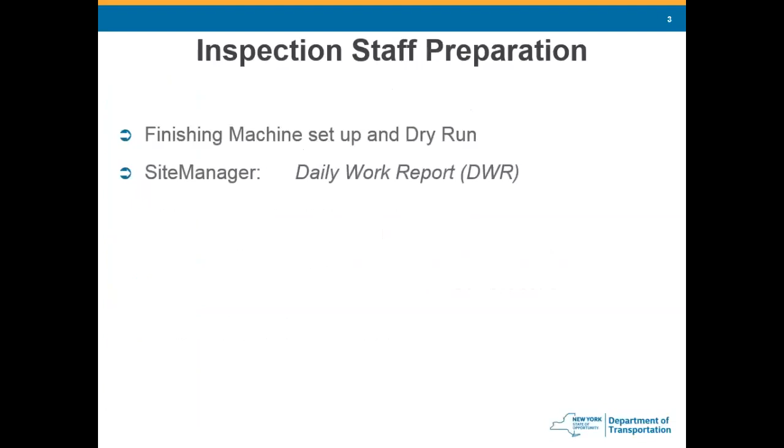The daily structural concrete report is the MERC 5, and that'll catch all the information you need to transpose into site manager. You should be familiar with what material certs are required - plenty of certifications have to be entered through site manager, and you have a lot more when you're placing concrete.

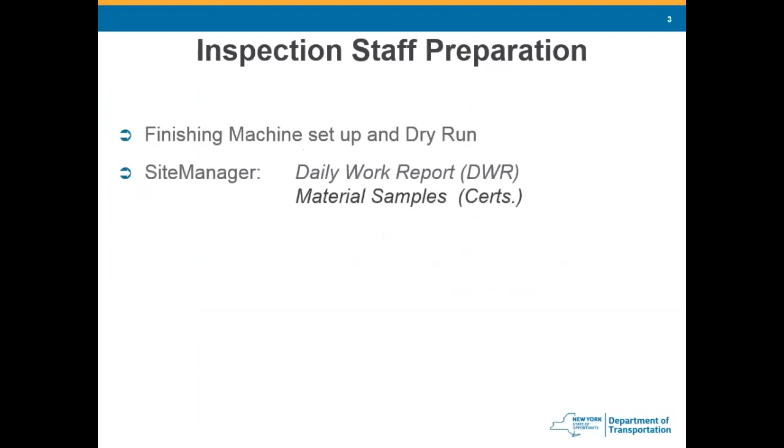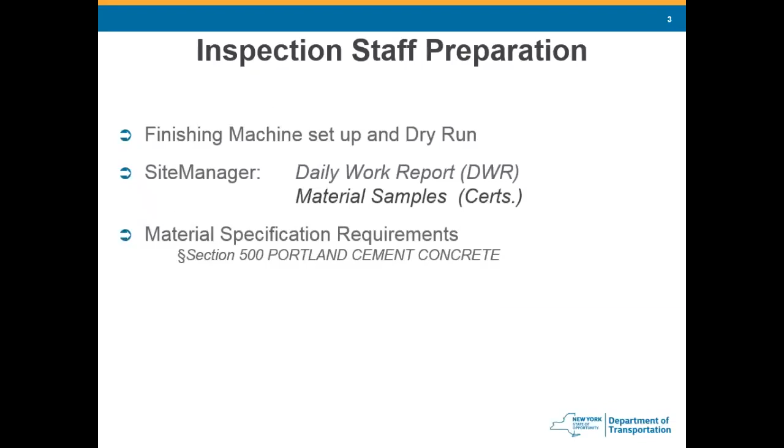Material specification section 500 of the standard specifications covers Portland cement concrete in general. The bridge deck item is section 557, which covers superstructure placement, sidewalks, and approach slabs.

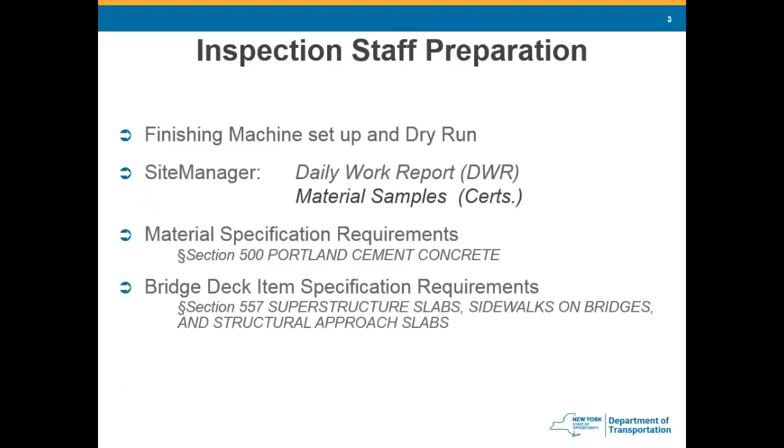So, advanced preparation. A pre-placement meeting - the specifications say the engineer should schedule that meeting at least 2 weeks prior to any placement of concrete for the superstructure slab. Generally, a good rule of thumb we tell engineers in charge is about the time the contractor is setting the steel girders, that's about the time to have it. We want to have the meeting 2 weeks in advance.

There's a lot of stuff that's covered. When you're having the meeting, you're going over stuff, and all of a sudden you realize, oh geez, we forgot about this, we forgot about that. That takes time. You don't want to have the pre-placement meeting a day or two before the concrete placement because you could run into trouble.

Also, once the girders are set, you're going to complete a haunch table, and the haunch table is used while you're doing the dry run out in the field.

During the pre-placement meeting, the main office materials came up with an agenda to cover various aspects of the placement. You have the general placement information - what date it's going to be, what time they're going to start, what the delivery schedule is, how they're going to place the concrete - one pump, two pumps, a pump and a crane, where they're going to be located. A lot of general information is covered.

Then we get into the materials information. For the pre-placement meeting, besides the engineer in charge, they'll have the regional materials engineer or somebody else from materials there, because now the contractor has to tell us how much concrete they want per hour, what slump they want, what air content they want. The materials people talk about what admixtures are being added - retarder, air entrainment, and other things associated with the mix. Then the deck machine is discussed.

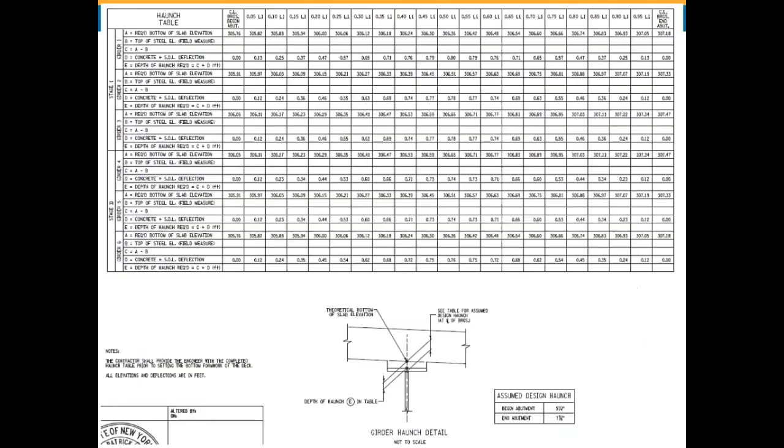Here's a blown up girder 1, blown up version of it. When you get the plans, you're going to have the required bottom of slab elevation. That's already filled in. They're going to give you the deflection based on the concrete that's loaded onto the girder. The girder is going to deflect a little bit.

I made up some numbers here, so the surveyor is going to go out, survey the top of the girder, come up with these elevations. So then they take the difference between the bottom of the slab and top of the girder. So that's the depth of the haunch.

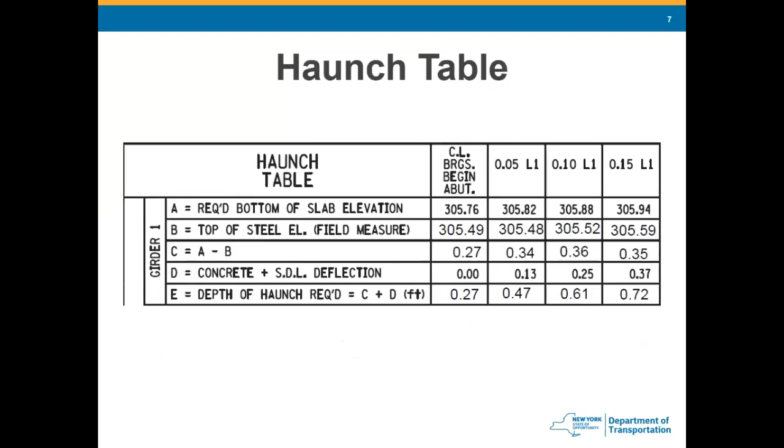Well, right here at the abutment, there's going to be no deflection because it's sitting right on the bearing. You start going out into the span, you're going to get a little bit more deflection, so your haunch is going to increase a little bit as you go out.

So if we look at the diagram I showed you earlier, you've got the haunch and the thickness of the deck, 9.5 inches, which is 0.79 feet. For point L1, the haunch is 0.61 feet. So 0.61 feet for the depth of the haunch plus 0.79 feet for the thickness of the deck gives you 1.4 feet. So when you go out there for the dry run, you're going to go to every 10th, 20th point, whatever they have laid out, and measure from the top of the girder to the bottom of the finishing drum on the machine.

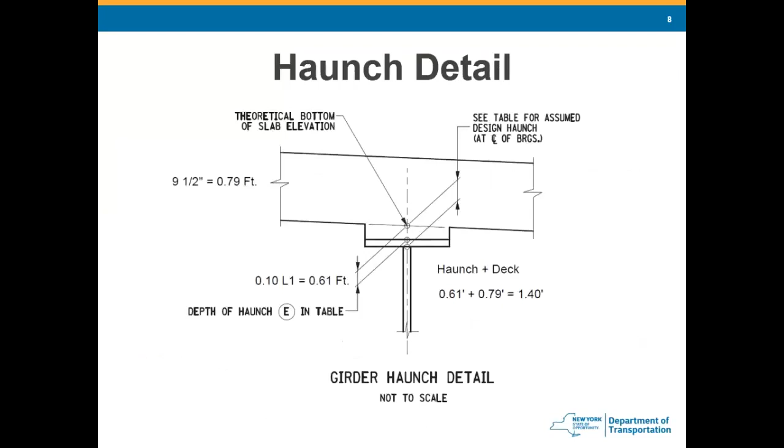So at point L1 on the first girder, you should measure 1.4 feet, which is basically 1 foot 5 inches, and that's the measurement you should have between the top of the girder and the bottom of the drum on the finishing machine.

So when you get out there for the dry run, the engineer in charge will have you out there if you're going to be the inspector up on the deck during the dry run.

Verify that the finish machine is set up. Travel rails, generally the contractor uses 2-inch Schedule 40 pipe that the machine runs on. It's set up on the fascia on both sides, supported every 2 feet. All this stuff is in the specifications, so there's a place to find it.

The engineer in charge should know where to find it. He should be pointing you to review this so that when it comes time to do the dry run, you'll have an idea of what's going out there. Plus, they should be explaining it to you while you're out there so you learn.

Verify the crown location. If it's a straight bridge, the crown of the road is going to be in the middle, so when they set up the machine, the crown should happen in the middle of the bridge.

String line the carriage rails. On the truss that supports the finishing machine, and on the inside of each truss, there's a carriage rail. The carriage runs back and forth across the deck on that carriage rail. Put a string line on it to make sure that it's set up properly, it's nice and smooth, and there's not going to be bumps going all the way across.

And you verify the cross slope on the carriage rail. You have a smart level, set it on the rail, and verify the cross slope.

The finishing machines, generally you'll see 2 of them. You'll see a Bidwell and you'll see a Gamaco. They're generally the 2 that contractors use. There is an Allen, that's a new company, very similar to the Bidwell.

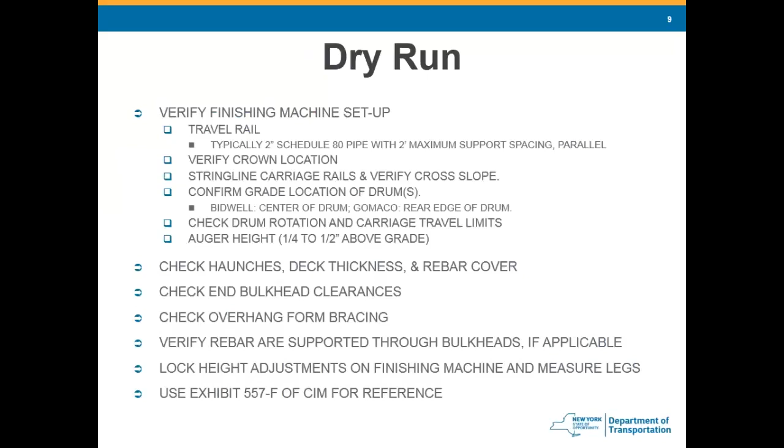So placement day, prior to starting, you need your testing equipment. Everybody that tests concrete, whether it's DOT employee or consultant, has to go through the concrete testing class. We have the in-house PCC training that the construction office materials group should be given to you. Any consultant should be ACI certified.

As I said before, the MURK 5d is the paper form of the DWR. You get that out in the field, it's going to get wet, it's going to get concrete on it. So you can fill that out, then transpose all the numbers into site manager once you get back to the field office. You need a concrete temperature, so you need a thermometer.

You're going to do a slump test. You're going to need an air pot with the backup, because there's been times you're out there, you got a 5-hour, 6-hour, 7-hour, 8-hour deck pour, and things are going good, and all of a sudden halfway through you're testing concrete, and all of a sudden you blow a seal on the air pot.

Well, it's always good to have a backup. Something could happen to the air pot you have on site, and all of a sudden you're getting bad readings, and you start rejecting trucks, and it doesn't matter to the contractor or the concrete supplier, and they get angry at us for rejecting trucks, then accuse us of testing wrong. Well, break out another air pot and check it again. Have them bring out an air pot and compare each one to the other, make sure the numbers are close.

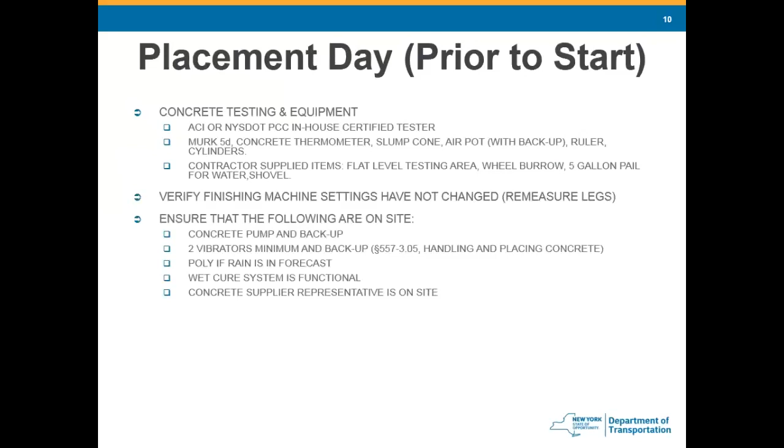This falls more on the engineer in charge to make sure it's right, but as inspectors, you're extra eyes out there, so you should be checking this stuff out. If you see something that's not right, bring it up to the engineer in charge and say, hey, how come they don't have 2 pump trucks there? What's going on? Ask the question.

Don't be afraid to ask the EIC the question. He could be thinking about 5 other things going on in the job and saw the concrete pump right there at the bridge deck and didn't look around to see if there was a backup somewhere. As an inspector, you're there to assist the engineer in charge, so make sure the pump is there with a backup, or if the backup's a crane with a bucket, make sure that's nearby.

Contractor has to have 2 vibrators minimum. Says that right in 557-305. Contractor shall have 2 vibrators on site minimum. It also says they need 1 vibrator for every 40 cubic yards per hour they plan on placing. So if the contractor's planning on placing concrete at a rate of 30 yards an hour, they're going to say, well, I only need 1 vibrator because I'm not exceeding 40. It's like, no, you don't - you need 2 because it's 2 minimum, and they need a backup.

Poly, in case rain is in the forecast - what's the contractor going to do if it rains? Well, they got to have poly on site in case a shower comes through so they can cover it up. Everything here that should be on site is nothing new to the contractor, nothing new to the engineer in charge, and it shouldn't be anything new to you if you were at the pre-placement meeting, because all this stuff is discussed there. Make sure they're going to use sprinklers. Make sure if they're pumping out of the creek, the pump works. If they're using municipal water, do they have a wrench to turn the fire hydrant on? They have to make sure everything functions beforehand.

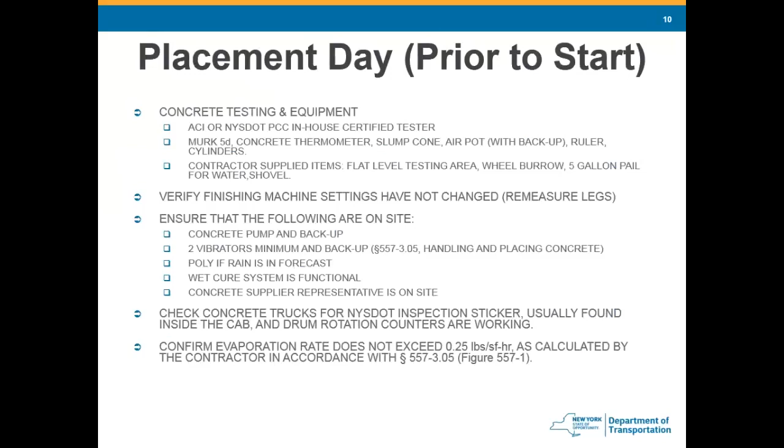So for a deck pour, we're going to have people at the truck and people on the deck. If you're an inspector down at the truck where they're dumping into the pump truck, you should have one or two people, because if it's a long day, there's a lot of testing for one person to do. So it's good to have a couple people there.

Also, the inspector's duties: this was something the materials group at the main office came up with and provided to the regions to pass out to their construction folks so they know what's going on out there. So when you're setting up your testing station, they give you a piece of plywood, usually a form, already with form oil on it, so it won't absorb any water.

Got to make sure it's level, so when you pull your slump test up, the slump cone doesn't fall over and you have to start all over again. Got to make sure the contractor has somebody there when they're backing the trucks in - we just don't want the concrete trucks backing in, pulling out, pulling in, backing out on their own. Once again, that's discussed at the pre-placement meeting.

So when the material arrives on site, you get a copy of the batch ticket. You've got to make sure the mix called for on the deck is on there, and make sure the D number is on there. You probably heard this earlier today for other materials, like asphalt - but you have to sign every ticket.

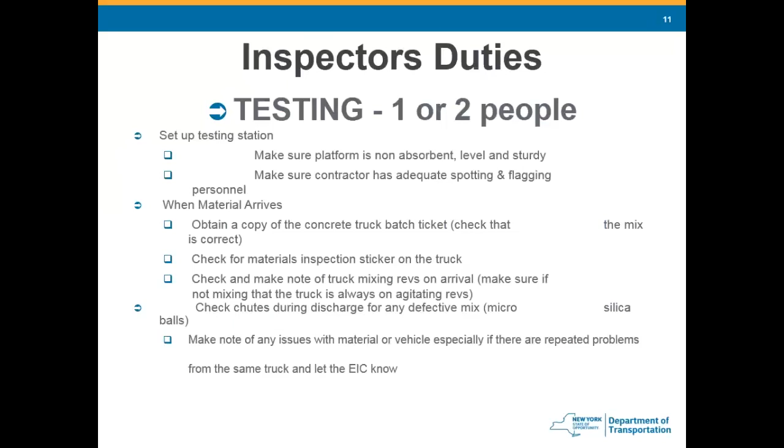So now, up on the deck, you're either in front of the machine or behind it. In front of the machine, where the concrete's going, the deck should be clean. There shouldn't be pieces of tie wire in there, no empty coffee cups, no chunks of concrete, no chunks of styrofoam that they use in the bulkhead, no pieces of plywood, nails, anything. Make sure it's clean.

And if it's a precast deck, if you're pouring the deck on top of precast beams, that needs to be pre-wet. Make sure there's no standing water on the deck.

So when they start up with the concrete, pumping it onto the deck, we've got to make sure that the concrete is vibrated properly. The vibrator people should be the last people stepping into the concrete. I have a picture coming up showing a deck pouring sequence, and I'll get more into what the vibrator person should be doing out there.

Make sure the finish machine rollers maintain a ridge of concrete on the cut pass. So when they're doing the finishing pass, it's also the cut pass. At the front of the drum it should be about golf ball size, then taper down to nothing. If it's a Bidwell, it should be nothing in the middle of the drum. If it's a Gomaco, there should be nothing at the back of the drum. Give or take a little on the drum - as long as it's finishing nicely, we don't need to be exact. It's a bridge we're building, not a watch.

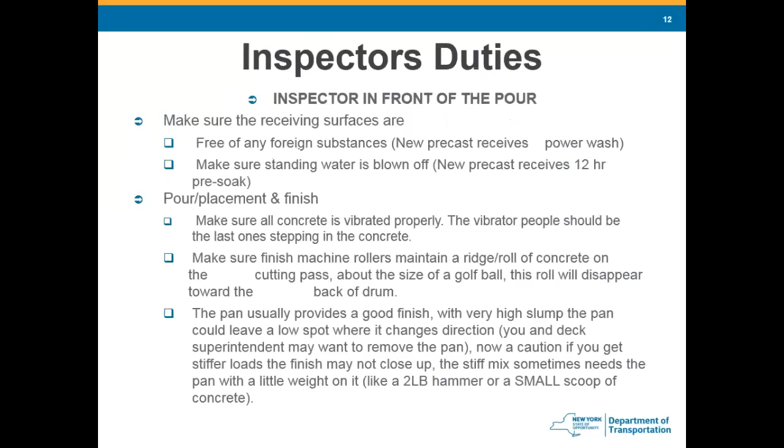It may need a little bit of weight on there just to make sure it finishes properly. So if the contractor asks the inspector, hey, do I need the pan? Have the engineer in charge answer that question, because he's the one making the big money on the job for DOT, so let him take the responsibility if he tells them no, you don't need the pan, even though it's required.

On the back of the pour, once the concrete finisher goes over the concrete, they're going to broom finish it, and then they're going to start setting the curing. The curing starts with wet burlap, and the wet burlap needs to be soaked overnight.

Once you're done with the dry run, ask the contractor - usually it's a cattle trough, and they've got rolls and rolls of burlap in there - where's your wet burlap going to be? Hopefully it's behind the deck pour, so when they bring it onto the deck, they're following the machine and don't have to carry it past the machine to put it out. The contractor should show you where the burlap is: here it is, we're going to put it out this afternoon. Before you leave that day, make sure they've got it covered with water.

The broom finish, turf finish, usually they use a new piece of turf drag. They'll put it on - some contractors put it on a bull float. Other contractors, a little more creative, will take a 6 or 8 inch piece of PVC round pipe and wrap it around that. That way it's more cylinder shaped, so that when the guy's up on the work bridge pulling it, whether he's out 10 feet away or 3 feet away, it still has that nice curved shape, so he's still getting a nice broom finish on it.

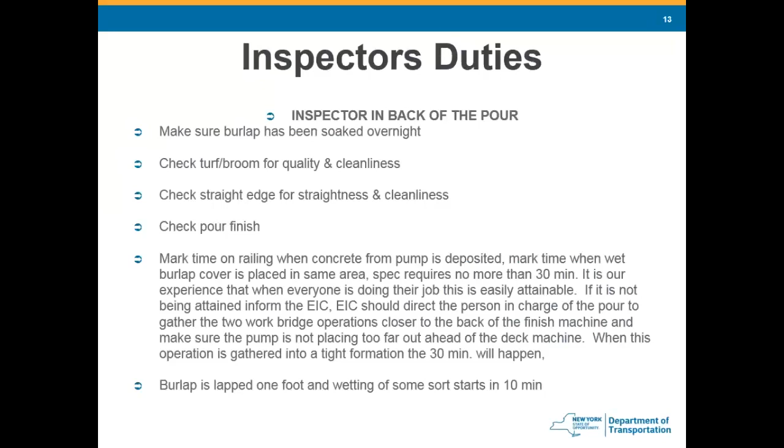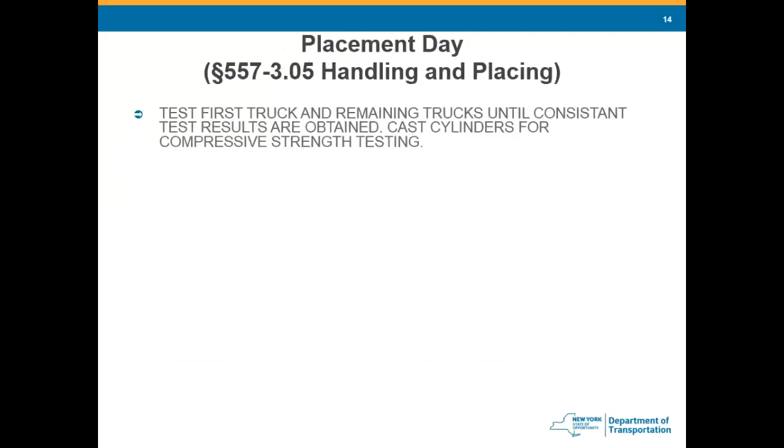So the first truckload shows up on site. We're going to test the first truck, make sure it's in spec, make cylinders. Now we're going to check the conveyance, how they're conveying it, make sure we're not losing more air or the slump is getting too stiff.

Depending on the pumping company - I'm from Albany, the Precision Pumping is who we use. Their oldest truck is probably 3 years old. They're constantly buying new trucks. We never have a problem with them because all their equipment is new. They take care of the equipment. But if you get a ratty-looking truck showing up and it looks like the guy doesn't take care of it, you may want to check the concrete from when it goes into the truck to when it comes out of the end of the pump hose.

We accept the concrete at the point of discharge of the truck, so that's why we have to check the pump truck. If the pump truck is taking too much air or too much slump out of the concrete, we can reject the pump truck. The air can vary 1.5%. The slump, if it's 4 inches or less when it goes into the pump truck, it should not lose more than 1 inch. If it's greater than 4 inches, it shouldn't lose more than 1.5 inches.

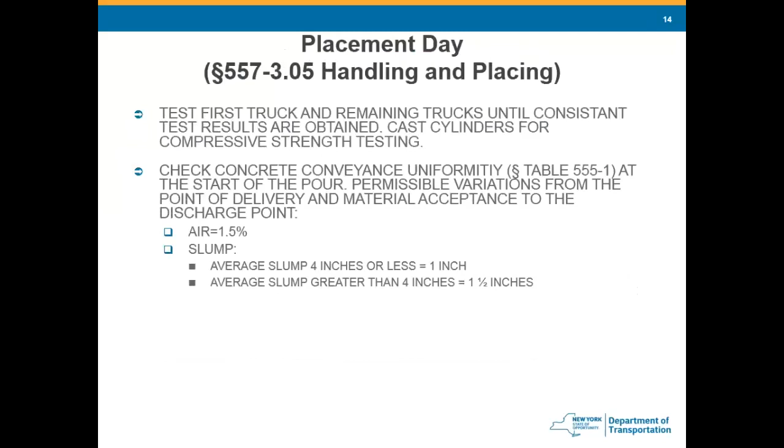There's a lot of times we don't test this because all the trucks are newer, but if you've got an old ratty truck, you want to take this test at the very beginning, because you've got the concrete truck set up, the pump trucks there, right at the beginning of the deck. When you grab a 5-gallon pail of concrete to do an air test, you don't want to lug it three-quarters of the way across the deck. You want it nice and close and easy to get to.

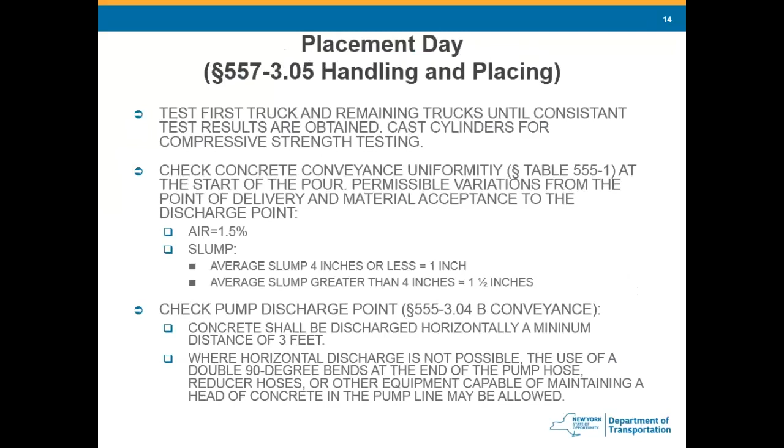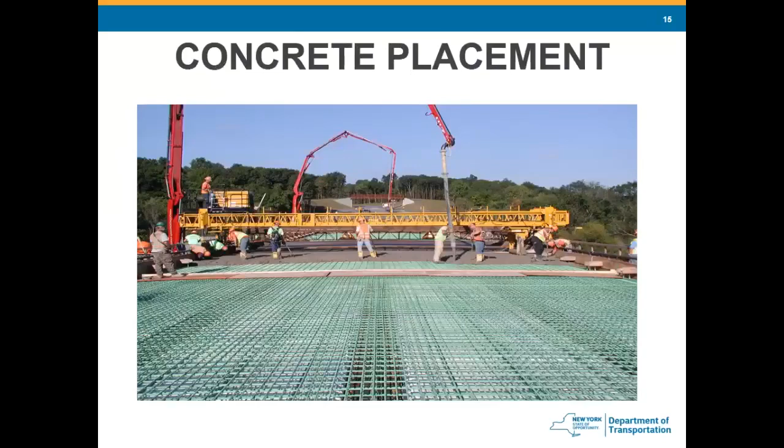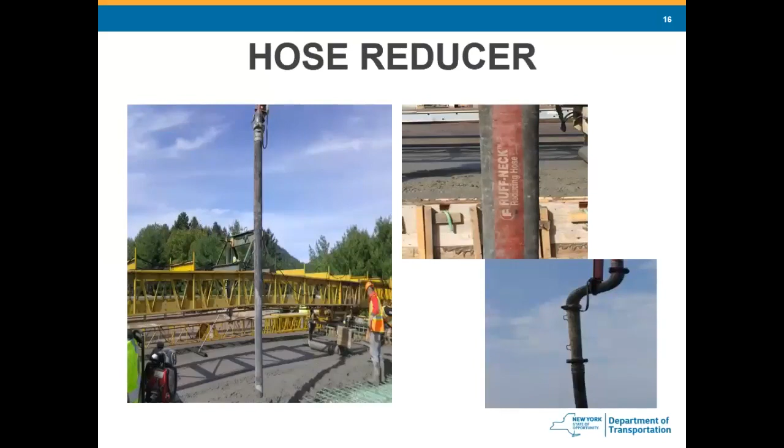Hose reducer. Here's a hose, it goes from 5 to 4. Looks like any other regular black hose covered with concrete. However, in this picture there's a red stripe on it, and that red stripe says reducing hose. The other thing the pump company has may just be a short piece of steel pipe where they're reducing at the end of the boom.

Loading on a skew. If the bridge is on a skew, the contractor should be loading the concrete on a skew. The reason for that is so each girder is getting loaded at the same time and the camber is coming out of all the girders in uniform. So the machine needs to be set up on a skew to follow the skew of the bridge deck.

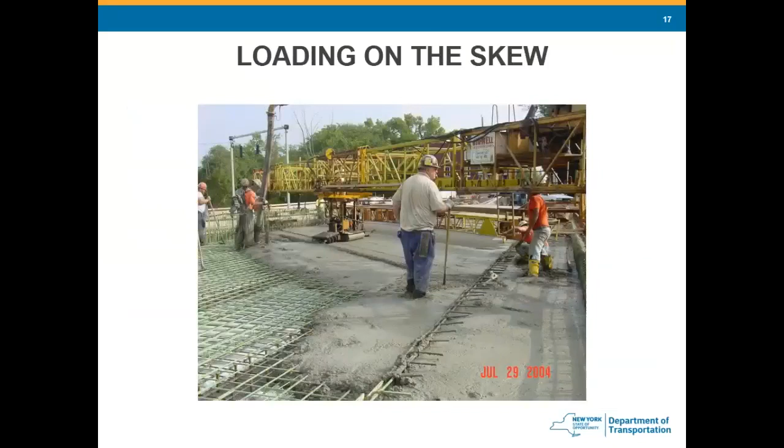So here's a Bidwell. We got the concrete in front of the auger. Their manual says the auger should be 1/8 to 1/4 inch above grade. Front of the drum, 1/8 of an inch below grade. Back of the drum, 1/8 of an inch above grade. That puts the finishing point right at the middle of the drum.

Here they actually got 2 pans. Usually it's only 1 pan, but they're probably trying to sell the contractor the elite package, so it tells them you need 2 pans, and you also need the turf attachment back here. The specifications say that the turf should be hand turfed by a person on a work bridge. So they're going to try to sell the contractor the best package they got.

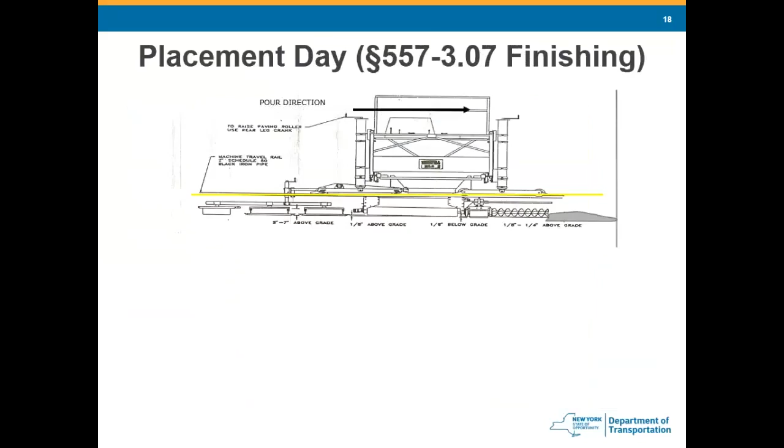Pour direction, we're moving left to right. So you got to make sure that there's not more material in front of the auger that's going to cause the auger to lift up, because if the auger lifts up from trying to push too much material, it's going to cause the drum to not finish correctly, and it's going to screw up the whole works. So we got to verify that it's not being overloaded.

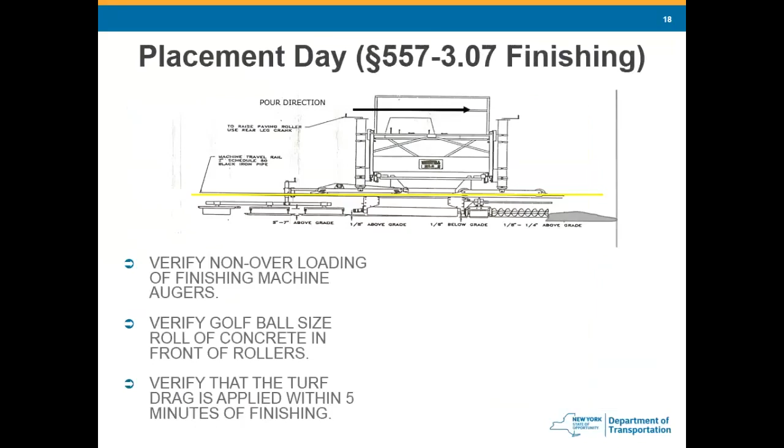Verify that the golf ball size roll starts there and goes down to nothing. Verify that the turf drag is applied within 5 minutes of finishing, 30 minutes from when concrete's placed in front of the auger. But when the contractor puts the turf drag on the concrete, they should have it covered with burlap within 5 minutes. And the manual tells you, once again, only fill up the auger half full. There's that little golf ball size roll I've been talking about.

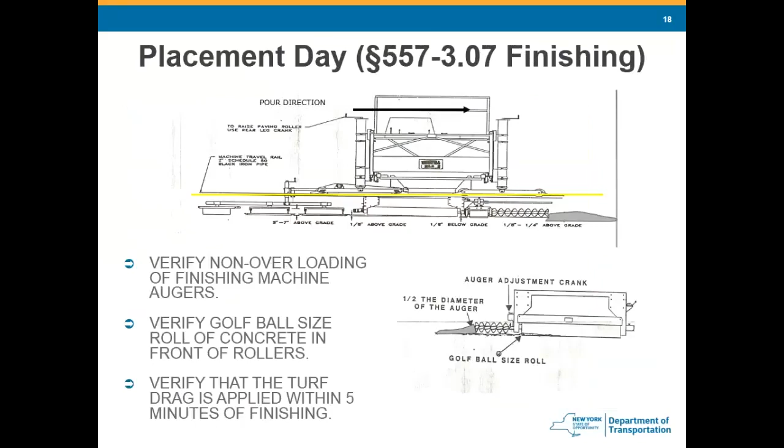So it's a double drum machine -- it has 2 drums on it, rotating in different directions. One drum is just standing in front of it, rotating clockwise while the other one is rotating counterclockwise. The benefit of a double drum machine is it allows the contractor to advance on the deck after each pass. They go to one side, move forward 6 inches, go to the other side, move forward 6 inches, because they cannot advance the machine until the finishing pass.

On a single drum machine, they have to go over the deck with the compaction pass, come back with the finishing pass, then they can advance 6 to 8 inches. So they can move a little faster with a double drum machine.

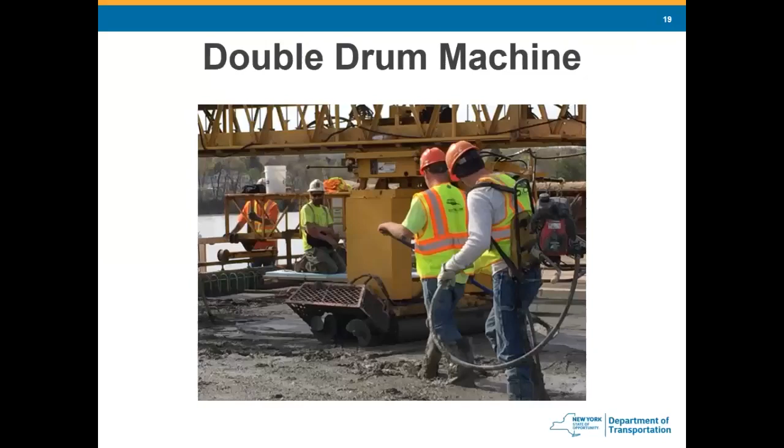The only trouble with a double drum machine is the golf ball size roll is between the 2 drums. Pretty tough to see what it is, but if they have too much concrete in there, it will dribble out behind the back of the drum, so you know the auger is too high. Mainly that's the cause. If they have concrete coming out from the back of the drum, it's because the auger is too high and they're not pushing enough concrete away from the machine.

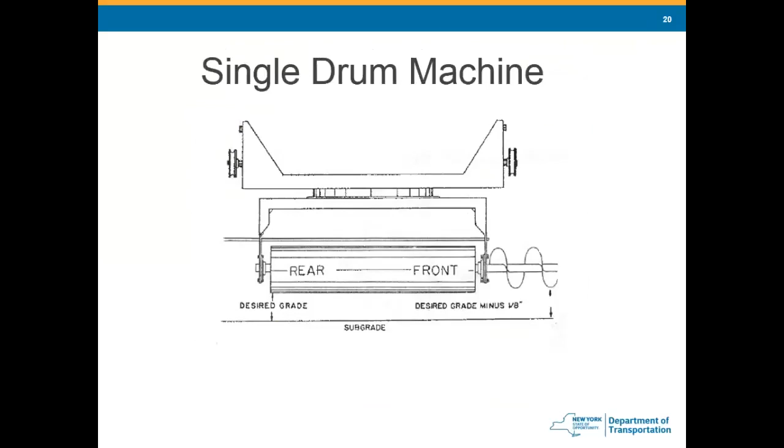So single drum machine, Gomaco, front of the drum, auger. Front of the drum is 1/8 of an inch below. Back of the drum is at desired grade, so that ball of material should go all the way back to nothing back there.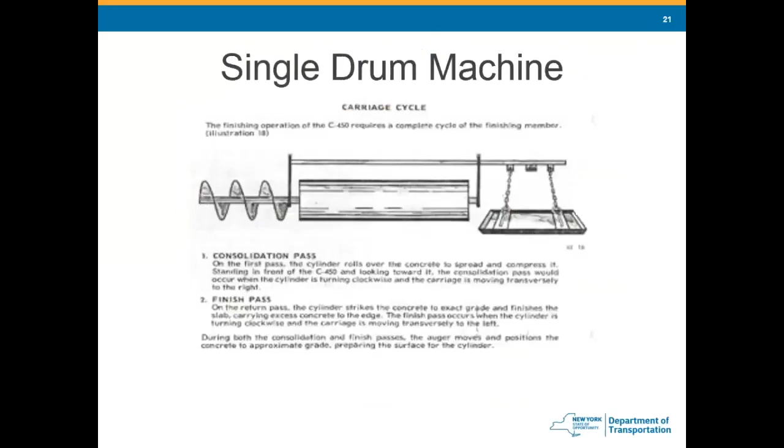Here's a single drum machine. Yeah, that's about a golf ball size roll. Looks pretty good. It goes back maybe 3/4, a little bit more than 3/4 of the way back to the drum. Close enough to the back of the drum. We're getting a good finish.

Finish doesn't look too bad there. We got the drag pan on there. It's looking pretty good there. Here, this has been turf dragged, so we smooth it off and then we rough it back up a little bit. So everything here is looking pretty close, pretty tight.

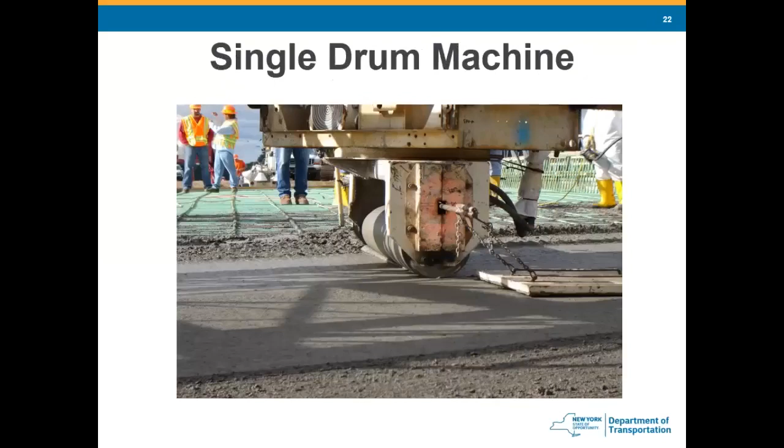Golf ball size roll, well, that's probably not really golf ball size, but they got a little extra there. The material could be a little wetter, so you can get a little more material in there. But it does dissipate before it gets to the back of the drum. It's still finishing good. The drag pan is still doing a good job there. So everything's looking good there.

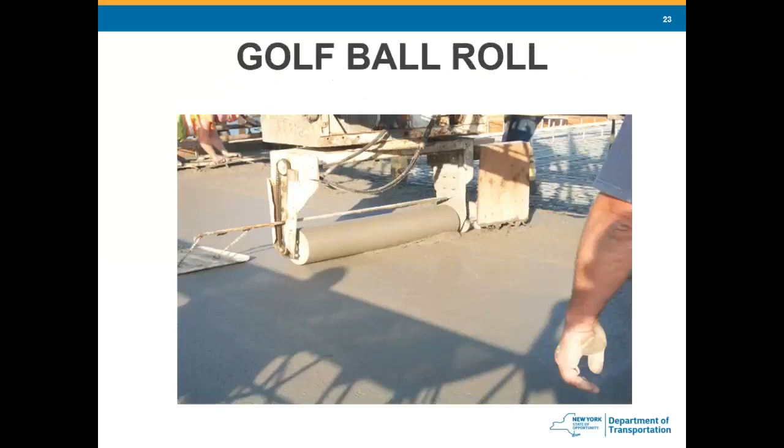Turf drag. Here's our guy up on the work bridge. He's just going to walk back and forth. He's going to pull the turf drag across. Looking pretty good. You can tell that the turf drag they're using is new because it's leaving nice grooves here.

Here's the finisher over here where the machine can't reach. When we have the pre-placement agenda, it's going to ask the contractor how far out from the edge of the bridge are you going to trowel finish. Usually we do a mag width, which is 18 inches. So 18 inches out from there is just going to be smooth, so the turf does not go all the way to the edge.

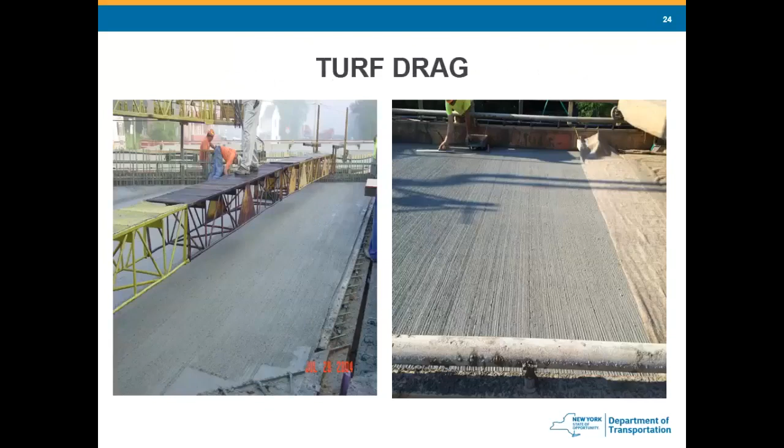Mainly that allows the flow of water to go off the bridge when it comes drainage time. So this guy back here is doing a little hand finishing, and if he has to make any adjustments where the machine can't reach, he'll turf drag it by hand first, and then he'll finish it with his float. Here's our 2-inch rail that the machine runs on. Burlap is being kept right up with the finishing guy, so everything's looking good here.

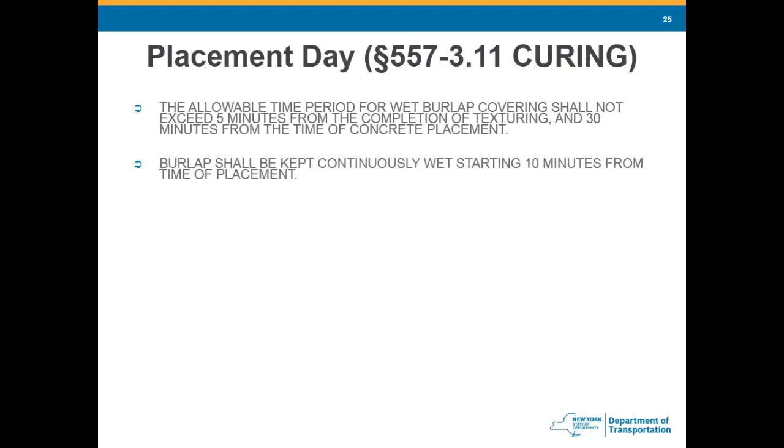The curing period begins once the placement is complete. It's a 14-day wet cure on the deck. If the contractor pours on, say, 8 o'clock in the morning, 14 days from today they might want to start pulling off the burlap and stop the wet cure.

But that's when you started the placement. It's when you end the placement that the curing time actually starts. So at the end of the day, or tomorrow, two weeks plus one day, you can turn off the water and start removing the wet cure.

A curing day is 24 hours above 45 degrees. The engineer in charge should know this, keeping track of the temperatures. The contractor can aggregate curing hours. So if it drops down to 40 degrees overnight for 8 hours, well, they didn't get 1 day - they got 16 hours, so they got two-thirds of a day. Once they get 14 days, 336 hours or somewhere in that ballpark, is when the cure is complete.

So they need to wet cure it 14 days, or they can continuously wet it for 7 days and then put curing covers over it.

Something new that we just started using within the last couple years is HPIC internal cure concrete. What that means is the fine aggregate in the concrete - 30% of that is made up of lightweight material, which means it has air voids in it. So while the aggregate is wet, it's going to retain moisture and help with the cure, hence why it's called internal cure. So the waiting period is only 7 days.

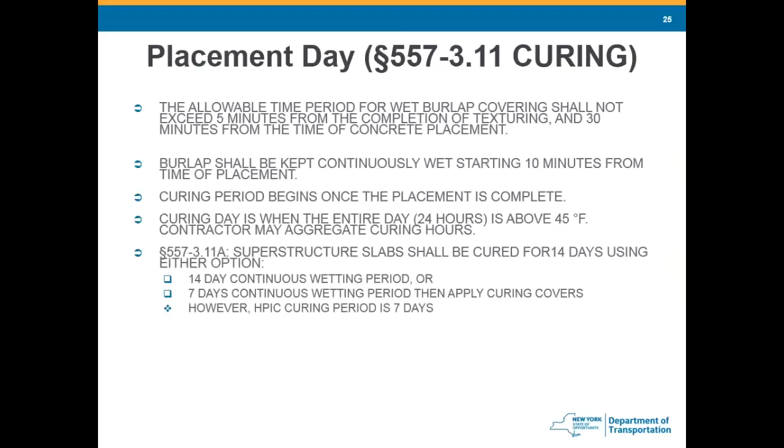That's why we have materials people at the pre-placement meeting, because they know all this stuff. That's their job, they know it inside and out. We refer to them when they get to talking the material stuff. You and the material guy from the plant can talk about everything you need to talk about, including the aggregate, where they're getting it, the hardness, and all that stuff that us people out in construction care about, but it's not our main focus. That's why we have a materials group to support us.

Approach slabs, sidewalks, safety walks - wet cure should be 7 days. That works out good for the contractor because they're going to pour the deck, then form up the approach slabs, and probably place the concrete in the approach slabs a couple of days later, a week later. So now the deck and the approach slab come out of wet cure at the same time. Plus the wet cure is less on the approach slabs because it's sitting on the ground - it's not supported by girders and doesn't need the additional cure time.

And beware of the bridge grade - water flows downhill. If you're on a long bridge with different pour sequences, the first day you're going to start at the beginning abutment, pour out so many feet, skip to the center pier, pour so many feet, skip to the end abutment, pour so many feet. Now you've got 2 areas in between that you need to pour 3 days later.

What they poured the first day is now having wet cure applied to it by sprinkler or soaker hoses. They're going to start the concrete placement for the 2 middle sections, depending on the grade of the bridge. Once you start pouring, the ideal thing is always to place concrete uphill - the machine works uphill, getting a better finish that way. Meanwhile the middle section is being wet cured.

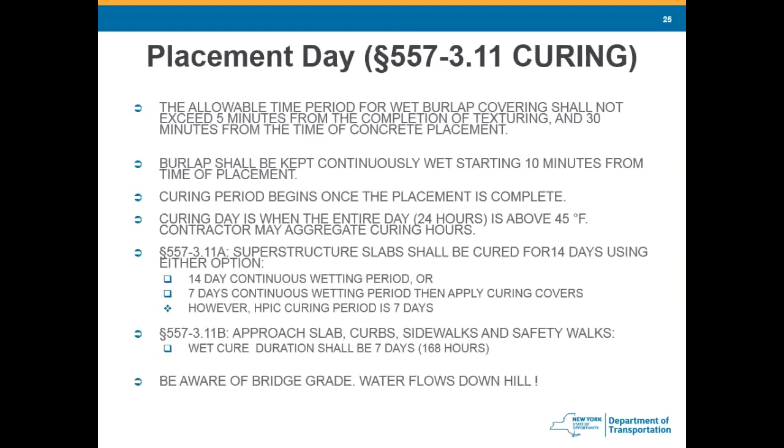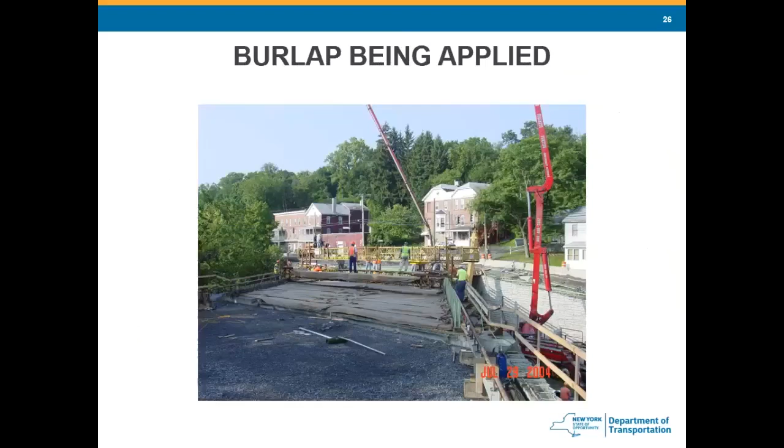Here's burlap being applied. Tight operation—we got the carriage, we got the burlap right behind it. Everything's getting covered up quickly. Helps that we're in the shade here, so the sun's not beating on the deck, which helps keep the concrete from drying out. Everything's keeping close.

We got the raker, we're only 3 feet in front of the machine. The contractor's got this timed perfectly so they don't get too far ahead of themselves with the concrete in front of the machine. That's the worst thing you can do, is get too much concrete out. They got 90 minutes from when the concrete is batched to get it out of the truck. What do they want to do with it? Put it in the deck. If they're 20, 30 feet in front of this machine, that's bad news because this concrete out here is going to start setting up.

Finishing machine. We got the drag pan right behind it, there's a turf guy right behind that, burlap's right behind that. Everything's moving along smoothly here. Finishers are over here just working hard, keeping everything moving.

Here, can't get much closer than this. You don't even have another width of the drag, or the turf drag here, without hitting the pan, so this is very close. They're putting the burlap down right behind that work bridge, so they're cranking right out on this front. Everything's timed perfectly, everything's working smoothly. You get all this stuff worked out at the pre-placement meeting, so that when it comes time to do the concrete, everything is moving along like a fine old machine. There's no delays.

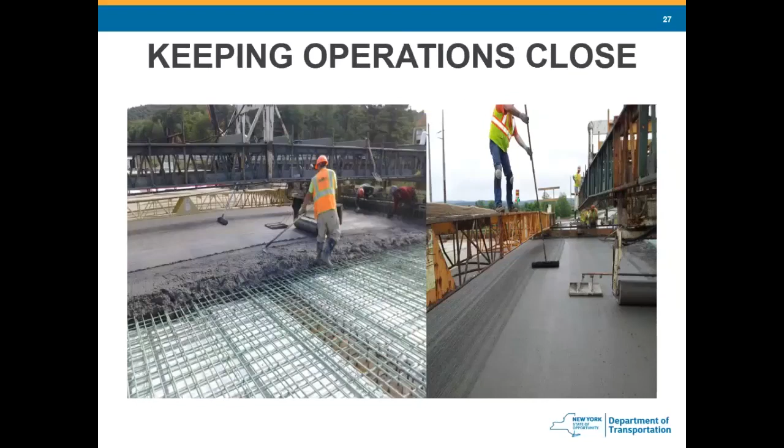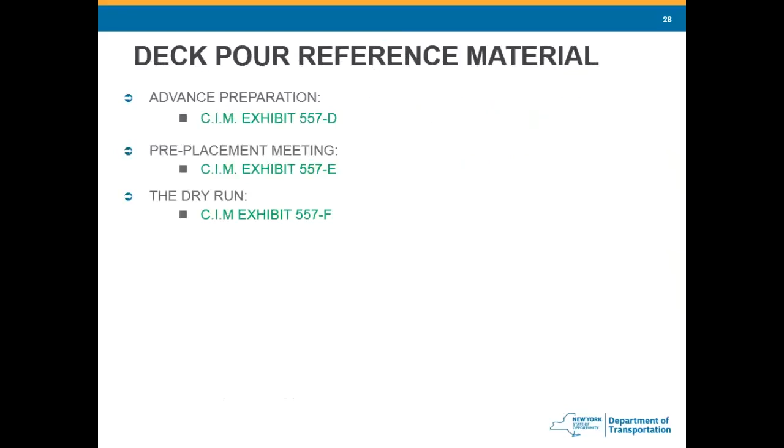As far as deck placements, there's all kinds of reference materials besides the specifications. In the Construction Inspection Manual, 557D talks about the advanced preparation, the dry run. Pre-placement meeting, 557E, talks about what should be discussed at the pre-placement meeting. We also have the agenda that main office materials came up with. The dry run, 557F, talks about what should be happening at the dry run, what you need to check out there. Day of the pour tells what the inspector should be doing, and we have the additional duties from main office materials that gave us an idea of what the inspector at the truck should be doing, what the inspector behind the machine should be doing, what the inspector in front of the truck should be doing.

Special circumstances, 557H, talks about things like if the plant breaks down, or all of a sudden a shower comes in—things that no matter how much you discuss at the pre-placement meeting, covering all the basic stuff we expect to see happen out there, a lot of stuff happens out there that you don't expect.

Sometimes the finishing machine will come off the carriage and drop into the deck. Now the worker's got to walk on the deck, can't do much about it—they're going to walk through all the concrete to lift the finishing machine back up. A work bridge is going to break and it's going to fall into the deck. We didn't talk about that at the pre-placement meeting because we didn't think it was going to happen, but it happens. You get the crane, get the work bridge out of there, fix it, get a new one in, whatever it takes. Meanwhile, now they got to go back and finish that area by hand. It's not ideal, but there's not much else we can do there.

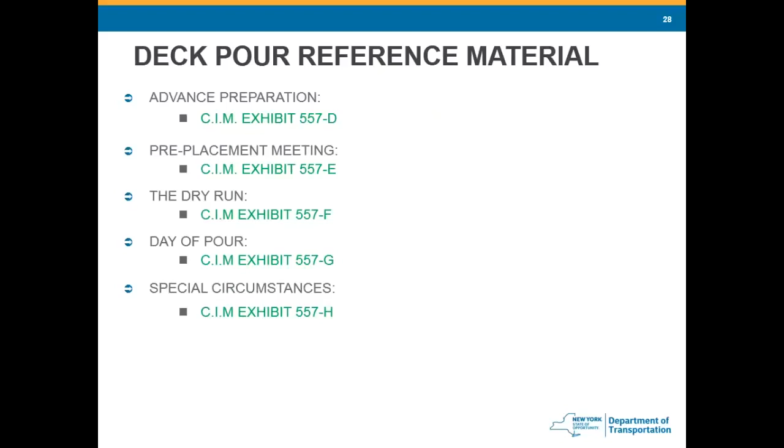You have all this reference in the CIM manual, you have reference in the spec book, and you have your engineer in charge to ask questions of. Don't be afraid to ask your engineer in charge questions—see if they know what they're doing. Ask them, keep them on their toes, ask them questions out of left field, what about this, what about that, see if they have the answer or look it up. Look it up first before you go run to the engineer with the question. I know we've gotten to the point where inspectors like to ask the engineer what should be done instead of looking it up in the spec book. As a construction supervisor, I have engineers in charge ask me, well, what should we do here? Well, what does it say in the item? Look that stuff up, so then you have an idea, you look for the answer first, and if it still ain't clear, say, well, I looked this up, I see this, but I still need a little further guidance—what do you think? And they should be more than willing to help you.